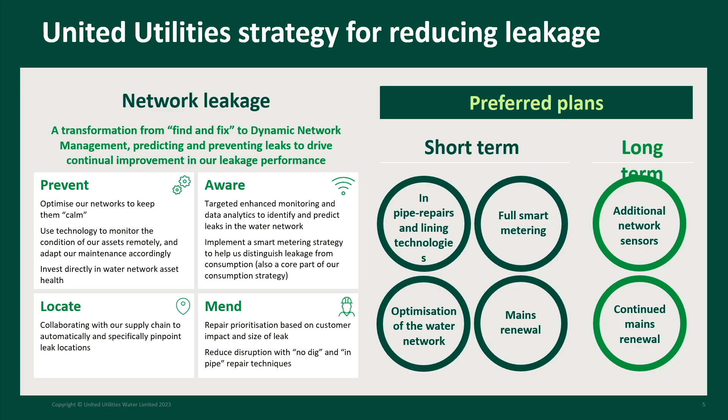And where it's coming from is a smart metering programme, so about 1 million household and non-household smart meters going in the ground over AMP8. And we know that comes with a massive data analysis burden or need, as well as a complete change in how we engage with customers around what's been spoken about already. So customer side leaks, plumbing losses in properties - that's one of the major parts of the strategy.

We're doing additional work on pressure optimization, so that's around optimizing our DMAs, but also optimizing the pressure management valves we've got in our network. But a lot of the leakage reduction we've planned is to come from replacement of water mains. So 695 kilometres of water mains, which fits into our wider programme of just under 1,000 kilometres of renewal.

So that's why we are posing some of these questions that Sam's going to talk through, because it's a really critical element of our programme in AMP8, and we don't really see a way to halve leakage by 2050 without a lot of this activity around mains renewal.

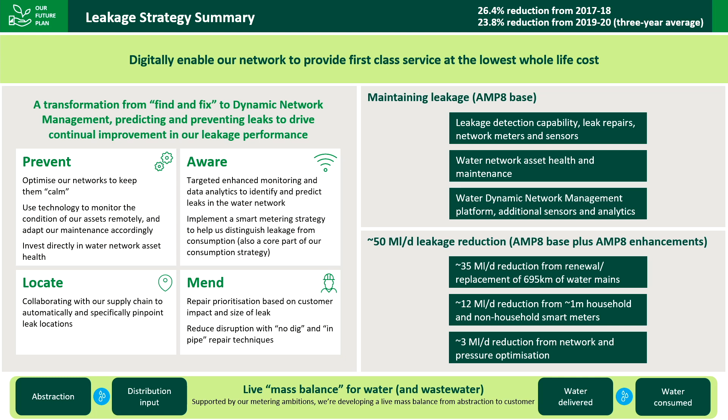So yeah, that's broadly our strategy. You can see the strapline: digitally enable our water network to provide first-class service at the lowest whole life cost. That's the aim. But this is a bit of context to the wider discussion on how we deliver mains renewal without the supply interruptions impact.

So when we were coming up with this strategy, we had to think about what was our priority. One of the key things we wanted to focus on was how do we get this balance between long-term investment and short-term performance-driven activities. So asset health was a key priority.

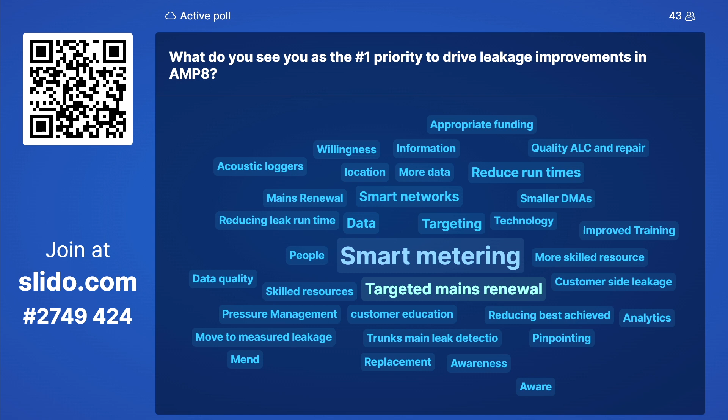Super, so by all means, please keep filling that in. Because what we'll do is, I want to take this as live customer research, or client research, or whatever you want to call it. This is going to feed into shaping some of those route map activities going forward, and actually really getting a view from experts across the room, from various different walks of life, what they see as key priorities for us going forward.

I'm thrilled somebody said targeted mains renewal, because it would have been really awkward if nobody had said mains renewal for the rest of the presentation.

But one thing that always strikes me when I ask these questions is around the temporal scale and the time scale of some of these activities. Some of these things are quick wins. Some of them are far more drawn out activities.

There are two different trains of thought, I think, of how we can tackle leakage. There's fast-paced, accelerating towards leakage targets that we set ourselves on a monthly, annual and in-AMP basis. But there are always hurdles in terms of how we need to deliver that performance. They may be technological hurdles, or something in terms of the environment in which we work in, whether it's an urban environment or a rural environment.

So I've kind of summarised that by saying, well, that's like the 100-metre sprint hurdles. We know where we want to get to, but actually it can be quite hard to get there based on some of those hurdles we've got.

And I was thinking, well, how do I represent that long-term view then? So long-term might be around those asset health improvements. Smart metering, it's going to take time to deliver increased meter penetration and build on those data sets and our understanding from that.

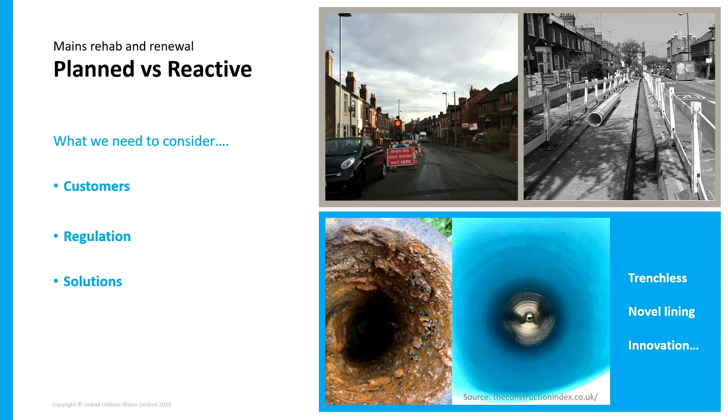So again, what we've got to try and work out is what's this balance then between customer interaction in terms of what they value and how quickly they want the water on.

Joe made a really important point that we've got to make sure that we're considering our priority services customers. There might be customers who any length of interruption is a no-go. So what plans can we put in place to mitigate that risk?

But also let's have a think about some of the other broader disruptions. Are there technologies, techniques, which mean we don't have to have 12 sets of traffic lights, which mean your school run takes 4 times as long and you've got screaming kids in the back of the car. So there's a broader customer dynamic to this, not just when's your water off, when's it back on again.

Now regulation at the moment does drive the way in which we deliver planned activity. If you look at the water supply interruptions associated with planned work across the sector, it's quite low, but it's quite low because we target that. We look at ways in which we can deliver planned activity, whether that be in infrastructure renewal or any other activity, adhering to that 3-hour window.

What that has meant is that infrastructure renewal rates over the last 10 years are probably at an all-time low compared to where they were historically. Certainly from a United Utilities perspective, we've not done a huge amount of renewal since about 2010, because we had really significant programs primarily focused on water quality up to 2010, and then have targeted other assets, so service reservoir inspections and remedial activities since then.

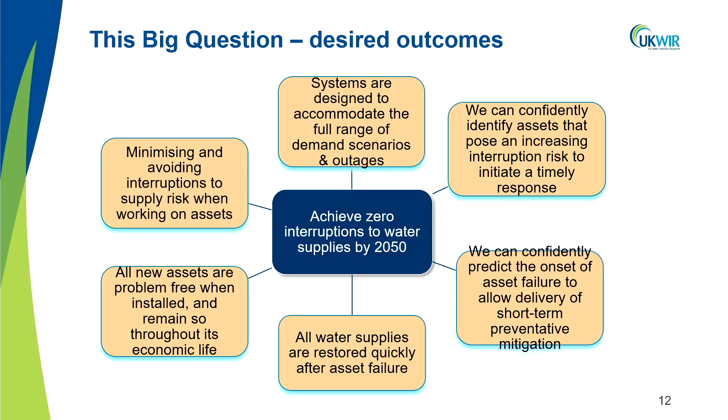And then the top outcome on there — this system is designed to accommodate a full range of demand scenarios and outages — really links onto this final slide, which is a question that is currently out for tender at the moment as a project. So some of the room may have seen this already.

As a big question team, we reflected a little while ago and said we've got great coverage at the moment, great understanding of two extremes. So water resources management planning — we've all got a framework that we work to. We've got a great supply chain that we call upon to support delivering those water resource management plans on a cyclical basis. And at a shorter timescale, we've got phenomenal understanding around our modelling capability, hydraulic models, water quality models, etc. But it felt like there was a bit of a gap in between.

At the moment there isn't consistency across the sector for that. Part of that is because we haven't necessarily got a framework to assess the benefits of those different opportunities, what works, what doesn't work. So really what this project is trying to do is look at, right, how do we balance things here?

I've used that word a few times while talking for the last 10, 15 minutes or so. How do we strike a balance where we've got customers' needs at heart, but we've also got a really clear view on those long-term challenges, the hurdles we're going to have to jump, that hopefully we're not going to fall over and get wet in.

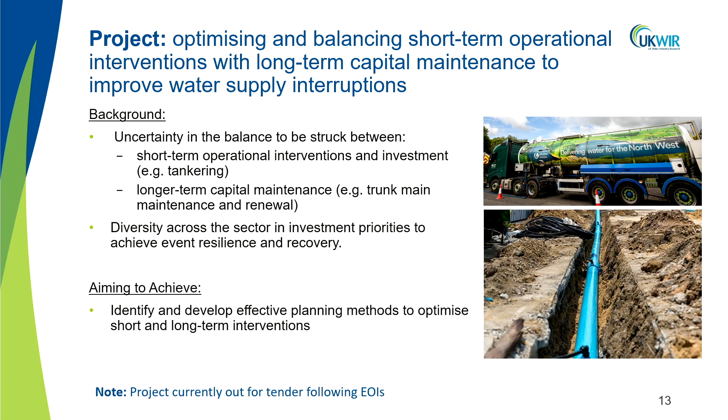Adaptive planning is here to stay. I say to a lot of people at the moment, I think in certain parts for PR24, adaptive planning feels like it's been forced on us. We've been told it's the right thing to do. It is the right thing to do, and that's one of the things we've really got to focus on going forward.

So I think that's really all I wanted to say. So my kind of plea for everybody in this room is, if some of the stuff that I've talked about today is important to you — and that might be you individually, it might be for your company, for your business — let me know.

Let Joe and Joe Parker know, because this is all part of the one voice journey we need to be going forward. Jez has spent some time over the last few weeks and months touring the country, not just for fun, but to speak to people about leakage and what it means for the leakage route map. The feedback from those sessions is that this is important and we need to talk about it. We need to come together as one voice through the leakage route map activity and the MEND work package, so we can establish what that looks like. This isn't a United Utilities view or a UKWIR view, it's a water sector view. I'll leave it there. Thank you very much.

So I presume we've got some time for questions. Do you want to just open that up for me? And then, yeah, hi there, thanks for that.

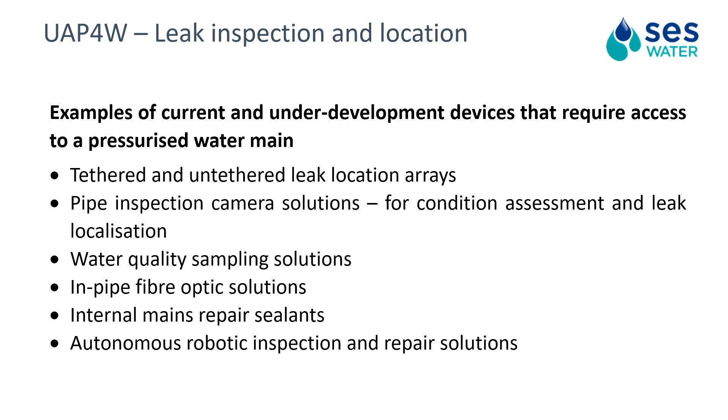What I was looking at was leak inspection and location. There's loads of devices out there, either current or under development, that we need to get access into that pressurised water pipe - tethered, untethered leak location arrays, pipe inspection, water quality, in-pipe fibre optics, internal mains repair sealants, and autonomous robots. The issue we've got is, every fitting we have is designed either for keeping water in the pipe or letting water out of a pipe. There is nothing designed for putting devices into pipes.

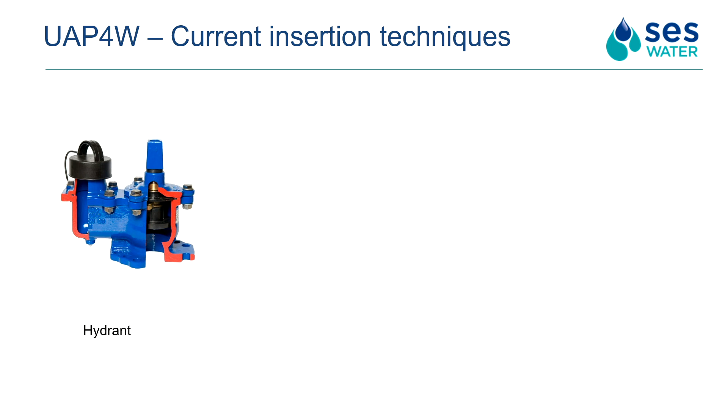So we said, okay, can we do something about that? Currently we say you do it through a hydrant, and everybody goes, that's all right, we've got loads of hydrants, just stick it through a hydrant. The issue with going in through hydrants is manifold. You speak to the suppliers who have to do this, and they'll tell you the number of times they turn up and are told it's a through-bore hydrant, it's easy, you can get on it, no issues - and then they turn up and can't get the camera in. It's not a through-bore hydrant, there's all sorts of issues.

The other issue is all your devices are constrained to go through a tiny entrance point. So every camera, every array, every sensor we put down through a hydrant has been naturally constrained because it's got to fit through that, and navigate the bends and turns inside a hydrant. Of course we could do under pressure tees - simple solution, cut in an under pressure tee and do it through there. But talk with the guys that have to do this, and they start waving their hands and looking very pale, because as soon as you do an under pressure tee, you've got a sharp edge on the inside of your pipe, which snags up all your cables and causes no end of problems.

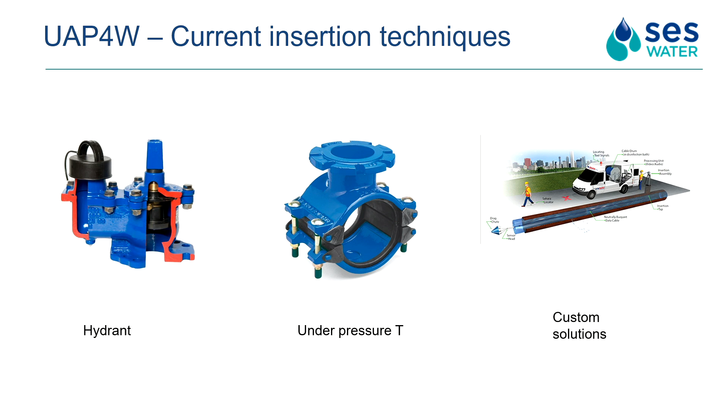Well, that's okay, we'll all come up with our own bespoke solutions - Sahara, come up with your own solution - but the trouble is that's designed for their solution, not for everybody. So we looked at this and said, okay, we need something we can install either when the main is laid, or subsequently cut into a pipe. It's available for a range of materials and diameters. It's a standard entry, but it fits 3-inch up to 12-inch. It's a single standard entry port, and it will allow devices either tethered or free swimming.

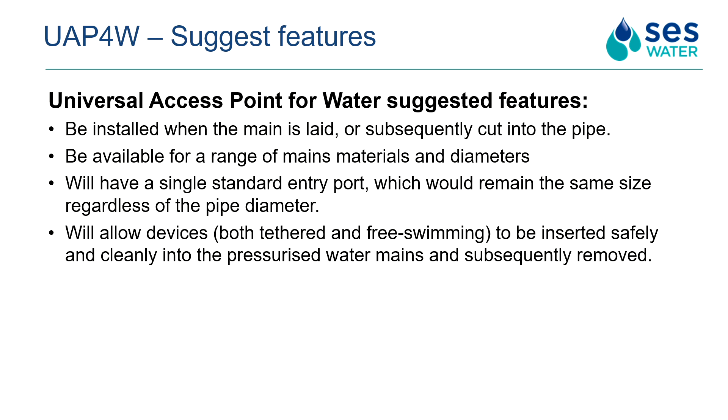You can stick them in and it'll go into a pressurised water pipe fine. DWI are looking at this - they're obviously slightly concerned with what I'm doing, going, you're putting stuff in pipes. I'm going, we're putting stuff in pipes anyway. Let's actually use something that's designed to do it rather than something we've just adapted, and we'd have safety features that stop someone unauthorised from doing that, as opposed to a hydrant, which anybody can go along to.

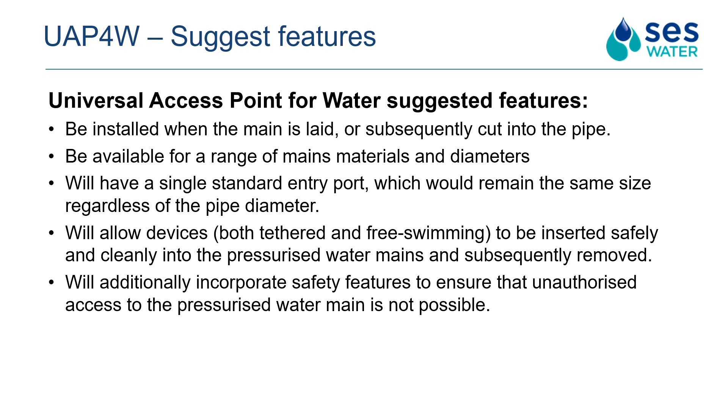And then have connection points as well. So the interesting thing about this is I'm running this project in a very similar way to how I'd run an innovation project at SES Water, my own company - rather than apply for all the money at the beginning and go to my directors saying I need this much cash to develop this and build prototypes, because the first question they'll ask is, is there actually a need? What's the design look like? So in fact, that's what I'm doing first, and that's all I've applied for in terms of funding. We're literally just doing the design piece and coming up with what it looks like.

The second really interesting thing I'm doing is looking at the IP, because generally the intellectual property associated with this is owned by someone, and they license it out saying, yeah, you can use my design, but you pay me money every time. We said, nope, not doing that. When Volvo invented the seat belt, they said this is for the good of the world, and put no IP on it because it's for the benefit of everybody. Interestingly, karaoke machines have no IP either - not that it's relevant here, but this is open innovation. There's no IP associated with this, so once we've done the design work, any suppliers out there will be able to pick it up and run with it.

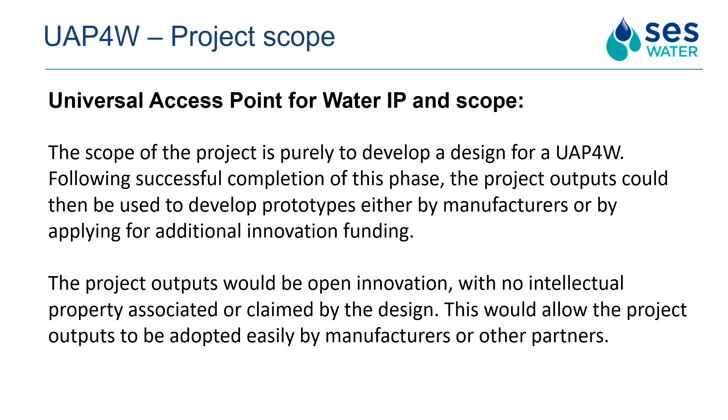And when we're doing this, we're not just doing the design work - we're going beyond that and looking at all of the economic values. We're looking at how much we think it will cost to produce. We're doing all of that side as well, so it's a complete piece of work for anybody out there to pick up and run with.

What's the advantages? Standardized dimensions - meaning devices that currently can't get through a hydrant, you could use. We get better sensors, better data storage, better battery capability. You can gather opportunistic data.

One example I've been talking about: you have a burst main. What you want to know is, is the whole main rotten? You'd love to know what it's like 150 meters in either direction, but supply interruptions are 3 hours - you've got to get it on as fast as possible, and your guys are standing there ready with torque wrenches to bolt it up as fast as they can. There's no hope of getting a camera or sensor device up there. So drop in a UAP, get it bolted up with the rest of the kit, turn the main back on, and suddenly you've got a point where we can put the camera both ways up 150 meters and actually look at the pipe to work out what condition it's in.

You've got a new estate being built - it's going to be laid in plastic, which we all love because, hey, plastic never leaks - as we all know, it does, and we have issues on those plastic mains. So you say to your developers, you're going to cut in UAPs here, here, here, and here, because in 4 or 5 years' time, when we're looking for leaks on your network, I want a point where I can stick a device down easily and run it through the network to find out where the leakage is coming from.

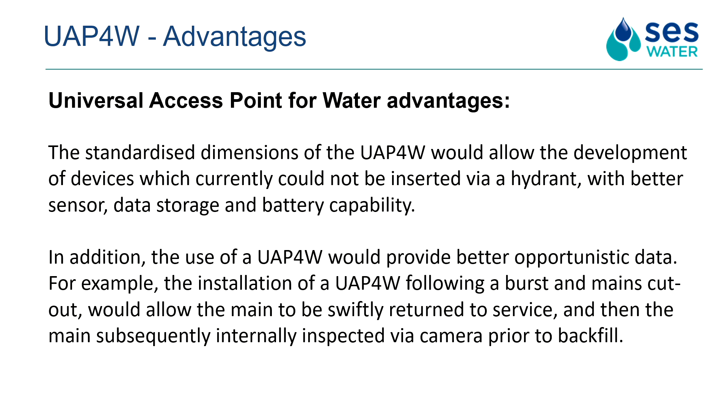So I'm working with them on that, and then Fluid Consulting as well, who are managing the project with me. So where have we got to?

Everybody gathered together and started going through. We ran it as a virtual session as well, so we did one that everybody could come to in London, and then we did the virtual session. Everybody could feed into that one as well, and we said, okay, why do we need a UAP?

What are the current limitations? What will it enable? Loads of post-its, you know what these things are like. Loads of coffee, post-its and cake.

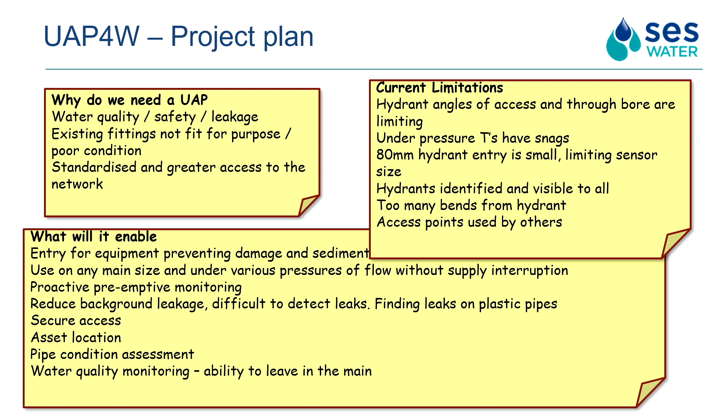And we started to come up with, okay, what's the must, should, could, and won't. I haven't put all of them up on there, but this is what we started to come up with. So we've now got an understanding of what this design should look like.

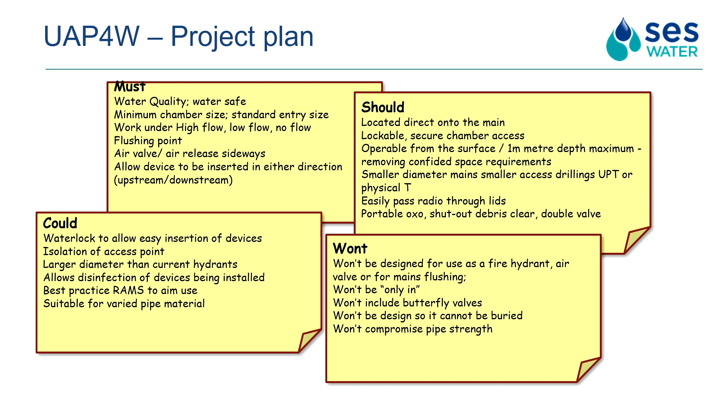So we're at that point at the moment. It's early days still, yeah? We've now got to take that must, should, could, and won't and start to turn that into physical designs.

I think I've won you some time back, haven't I? Yeah, fantastic. I'll do questions in a second, but look, the reason I'm telling you all this is...

Firstly, this is an Ofwat funded project. You've all paid for it, every single one of you, because if you pay your water bill, that's where that Ofwat fund comes from. Okay? So you deserve to know what's going on. So there we go, that's what some of your money has gone towards funding, this understanding. Okay? And secondly, you may want to be involved in it.

So as I've gone through this, you're thinking, yeah, my company would want to really be involved in that project. Fantastic. Come and see me, catch me, I'm at the conference, and grab me and say, yeah, we'd love to be involved in this. When's the next workshops? Can we see the outputs? Because although I have 8 companies working on this piece of work, it's open to everybody to join. Those workshops are not just for those 8 companies, they're for everybody that wants to be involved in this project and sees advantages, maybe just for their company. They're going, yeah, we'll be wanting to pick that up, or we want to redesign our sensors so they can use this. So please be in contact, love to have you involved and engaged on that.

I'm going to stop there, and you're thinking, fantastic, Jez doing a short talk for once. I'm going to stop there, but I will take any questions first. I need to jump back here, don't I, to the tablet? I don't, you stay there, mate, don't worry. I'll stand here. We've got the... So any questions in the room to start with?

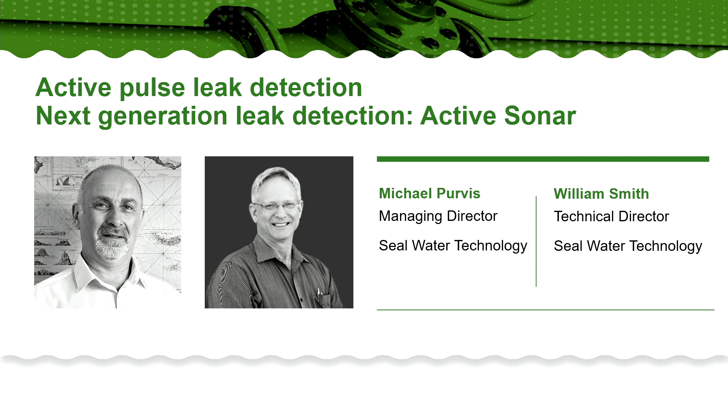As mentioned, my name's Michael and I'm the Managing Director of Seal Water Tech. We've been fortunate to be selected as finalists for the Ofwat Water Discovery Challenge, a funding program for smaller tech companies on a lower TRL.

Along with William, who you've just seen, coming from Australia - it's very early in the morning there, or very late at night, I'm not sure, but it's probably late at night because he's a night owl.

What we want to introduce to you is a new approach to leak detection: active sonar. With this technology we can detect leaks kilometres away in all pipe materials, including plastic. It's non-disruptive and non-intrusive to pipe networks.

So just showing you quickly here, this is one of our units, connected directly onto a fire hydrant going through a faucet valve. This was taken at Brands Hatch in Kent.

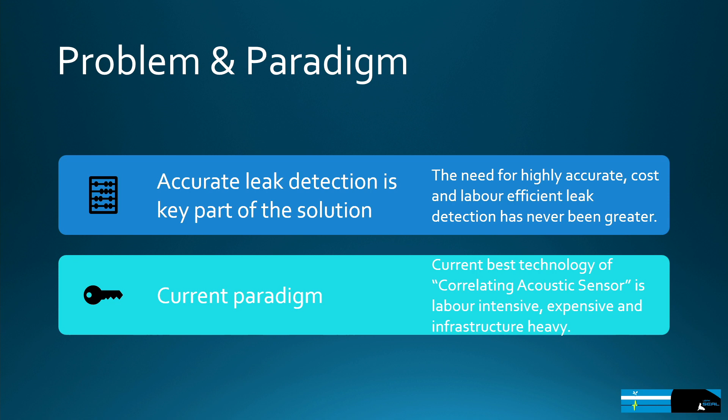I won't dwell on this too much, particularly with this forum, but water loss through leakage is a massive problem worldwide. Here in England and Wales, overseen by Ofwat, water loss through leakage has been driven down significantly. However, we're now approaching a scenario where all the low-hanging fruit, the easy to find leaks, have now been found and repaired. This plateauing is partly due to the limitations of current best technologies out there.

What we can consider one of the best technologies is correlating acoustic sensors. However, due to the fundamental physics of sound in water, these are limited and always will be limited to 200 to 300 metres in range.

So to break this low-hanging fruit scenario, we need a step change improvement in technology. This is where Seal's long-range solution can play a significant role in finding those hard-to-get leaks, particularly useful in trunk mains where you have limited access points.

If you've got, say, a 5-kilometre pipe and you've only got access points every kilometre or 500 metres, to correlate that you would need to get down to the pipe and put access points along there. We can do this from either end or from the centre.

It works equally well in plastic pipes - correlators are further reduced in plastic - and it's ideal for critical infrastructure where you don't want to be touching the pipe.

I heard people talking about the risk of access in the pipe. Some infrastructure you don't want to be touching, you just want to be monitoring it. As long as there are some access points on there, we can get in there.

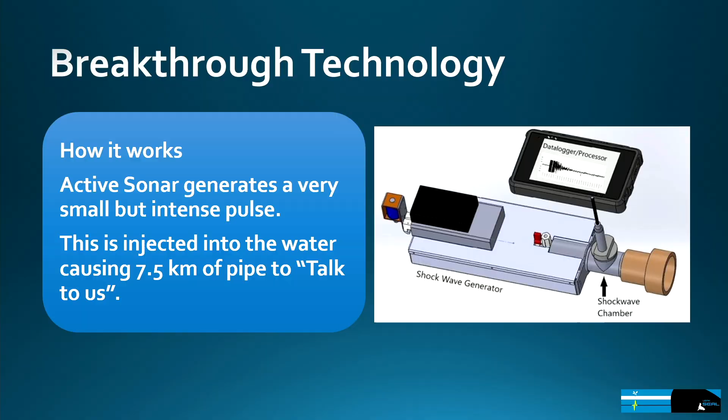How do we do this? What we do is generate a very small but intense pulse. We then inject this into the pipe, and this pulse travels down the pipe within the water.

This pulse travels down the pipe in the water and then interacts with points of interest.

These interactions we can detect, leaks being one of them. From this we can calculate the distances out to these points of interest. We can also pick up T's and elbows.

This is one of our data sets. On here there is 7.5 kilometres of pipe data taken from one test at one location. I'll start from the left.

On the left here, this is your background noise. On the left, this is where we've injected the signal into the pipe. Initially we get a lot of background noise, but this quickly dies down.

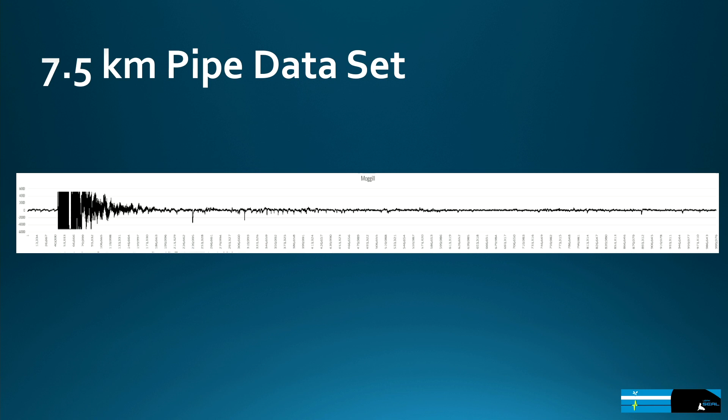As you move along, you can see negative pressure events all along here, and these are far greater than the background noise. What I'll show you on the next slide is what these line up to.

So going from left to right, that is distance from the test point, and this is 7.5 kilometres. Even at this range here, we're still picking up pipe features.

Drilling into the data, far left again, that's where we've initiated the test, and it quickly settles down. We have a big negative pressure point here, which lines up with a road intersection and a pipe intersection.

As we further go across to the right, we have a series of negative pressure events. These, I will show you later, lined up with 25mm T-sections coming off this pipe.

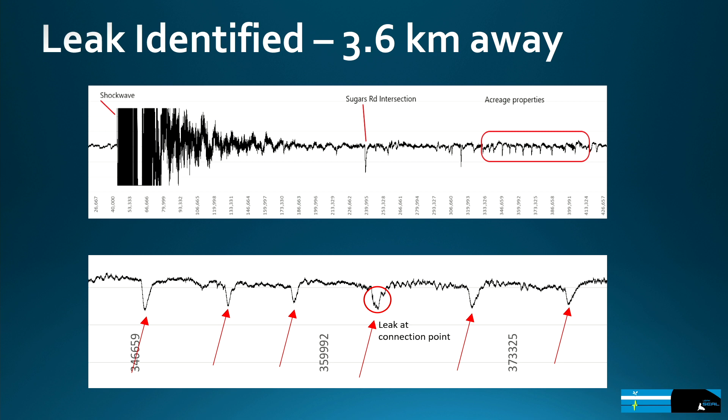Drilling in again, these are the same negative pressure events, and this one here has a classic leak signature. That's what we're looking for. This is our business - we then went out to this site, located the leak, and repaired it.

What we then do is scale our reading onto a GIS map. Up the top left here, where the circle is, that's where we did the test. The signal went to the left and to the right, then the signal came down the page, and this is the road intersection here, and some of the signal went left and right from there.

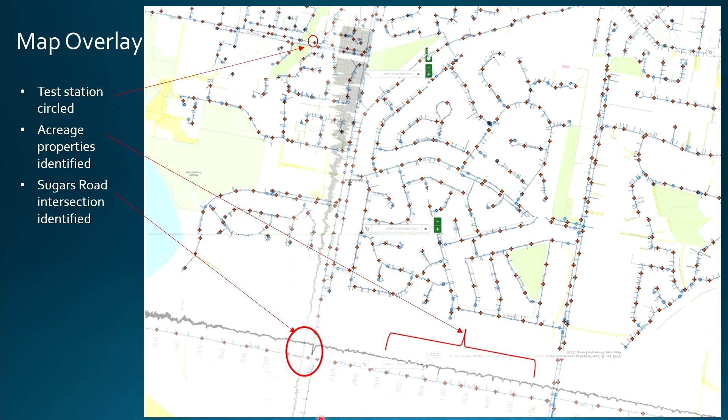Here is a series of small hobby farms, and this is where we got those series of pipe fittings. Like I said, we went out to the site, and the leak signature was tied into one of those fittings.

So where's the value in all this? Firstly, it's long range—we can survey kilometre sections of pipe at a time. Sound methods only cover a few hundred metres at a time, assuming you can get access to it. To monitor or survey a DMA, only a few units or tests are required. It's non-destructive and non-intrusive—as you saw in the first slide, we connect directly onto a fire hydrant, so it's ideal for monitoring critical infrastructure.

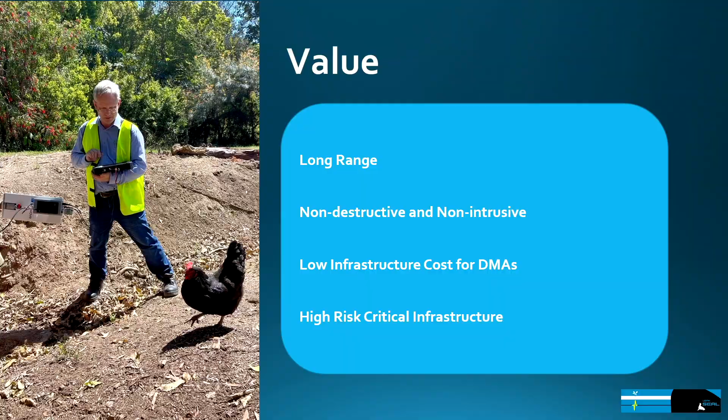So what have we been doing since we got the first part of the grant money? We told Ofwat we'd be spending the money on software, hardware, and doing proof of concept trials in the UK.

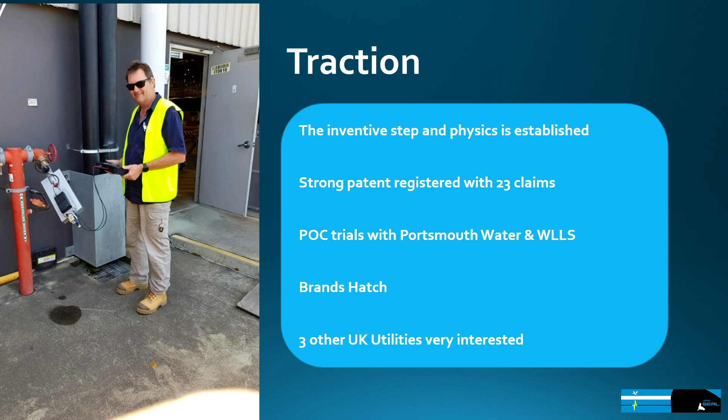Since the grant, we've been working with Andrew Mackenzie from Water Leak Location Services and Matt Burrows from Portsmouth Water. We went down there and had a series of pipes where we were testing. We've done a test on a larger diameter pipe—our prototype units are only designed for 50 to 80 millimetre pipe, but we tested on a larger diameter one anyway.

This pipe was previously correlated, with access points every 500 metres, and there was a leak signature picked up with correlation. We could verify where the leak was, but to be honest, because of our signal strength and the size of our unit, it's not designed for that size pipe. We could only pick it up because we were looking in that area.

So from that, we're now building a larger unit in Australia, up to 500 millimetres. That will be tested and run through in Australia before we bring it out to the UK.

We've also done another trial down in Portsmouth where we had a 3.2 kilometre section of pipe. We went to the first point on the test, but it was too noisy, so we went to the other end of the pipe, and we picked up a leak signature.

This was later verified by satellite to say there's a leak in this area, but again, that hasn't been dug up yet. We've retested it again, and we're just going through the data to try to locate where the leak is. We're testing it from both ends—previously we only tested from one.

We did a signal strength test. We got Andrew and Carl from Portsmouth Water and put them in a field 1.2 kilometres away from the test point. We sent a signal down there, and they picked it up 1.2 kilometres away from the test point. That could never happen with sound technology.

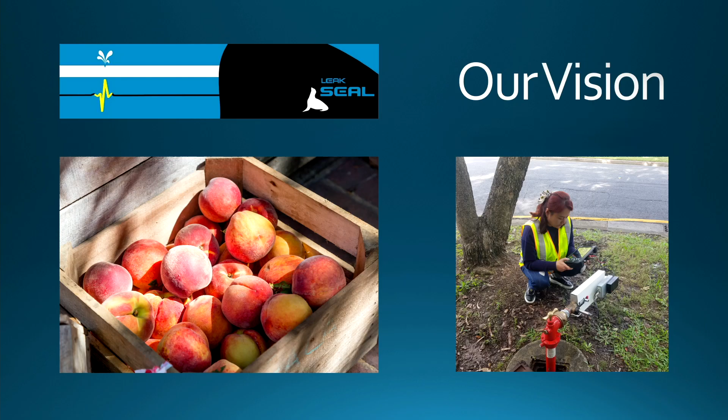So just finishing off, if we want to make water more efficient in England and Wales, we still need to deal with leaks. We've got rid of the easy ones. We now need technology to find the harder to get ones. This technology will help build more sustainable networks for the future.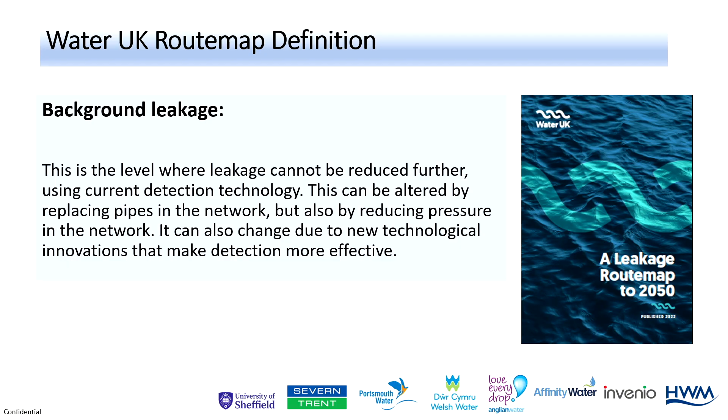So this project came about at the start of 2021, shortly after Water UK had committed to this 50% reduction in leakage by 2050. And I put this graph together.

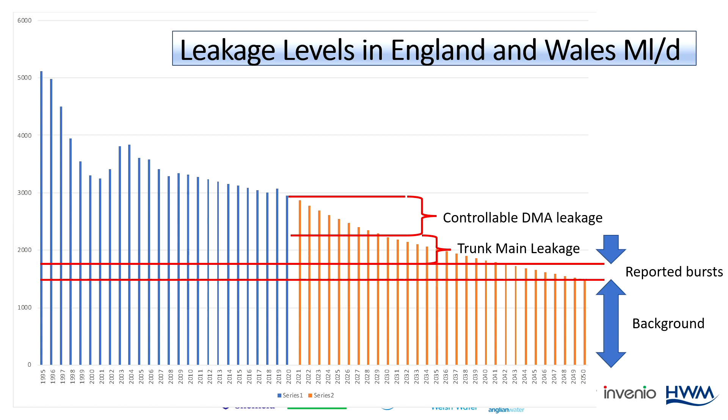It was a bit of guesswork at the time, but what I was trying to show was how can you reduce leakage by 50% if, as a guesstimate, 50% of that leakage is what we call background leakage? On top of that, we've got leakage from reported bursts - everybody has a burst that's running that they know about, awaiting repair. And then you have trunk main leakage on top of that.

So the background leakage, we really refer to background leakage in DMAs. There's only this bit at the top, probably 25% of the leakage, which you're controlling by new technology to become aware of leaks quicker, find them quicker and repair them quicker. So really the challenge is, what do we do about this background leakage and how well do we understand it?

Some terminology: MAL is the minimum achieved level of leakage, and that's what we focused on in this project. It's the historic minimum achieved level of leakage in the DMA from night flow measurements.

We actually had a challenge of how do you define that though, and we had to come up with a method of estimating it. Then MABLE, the minimum achievable level of leakage, is based on the theoretical minimum achievable level, based on infrastructure in good condition from the managing leakage reports. Essentially, the MAL level is the level of leakage you're left with after you've done a normal leak detection sweep through a DMA.

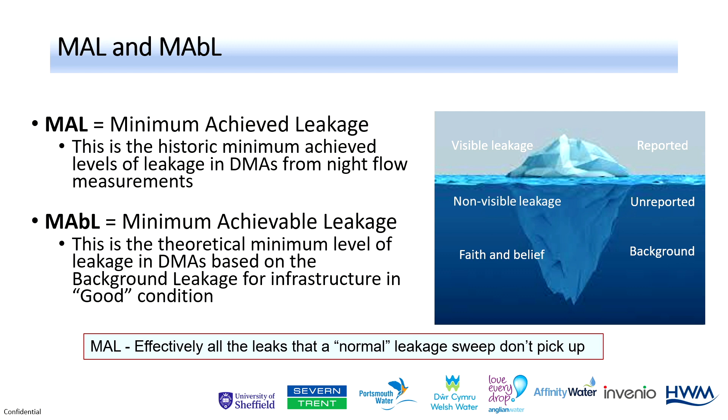MABLE is based on this table in Managing Leakage 2011, report 4. It was originally introduced in the managing leakage reports in 1994, and defined as the level of leakage from minor leaks - small leaks from valves, joints, hydrants and so on.

It was believed that those leaks would generally be less than 100 litres an hour and not individually identifiable on a DMA flowchart. But the report did say there could be some undetected leaks in the range of 100 to 500 litres an hour in those DMAs.

And we sort of picked up on that and thought, well, how many of those larger leaks are included in the minimum achieved level of leakage, the MAL level? But again, it was expected that leakage level, that MAL level, would reduce over time.

But it's 30 years since these reports were produced. Technology's moved on a pace, and yet we're still left with 50% of our leakage being this MAL. We estimated that at the time. So that's the background to the project.

Just to point out that these values were actually heavily weighted towards the customer side at the time. The distribution mains is in litres per kilometre per hour, and the service pipes, the com pipe and the supply pipe, are in litres per property per hour. But if you look at a fairly average mains length per property, it is heavily weighted towards the supply pipe rather than the mains.

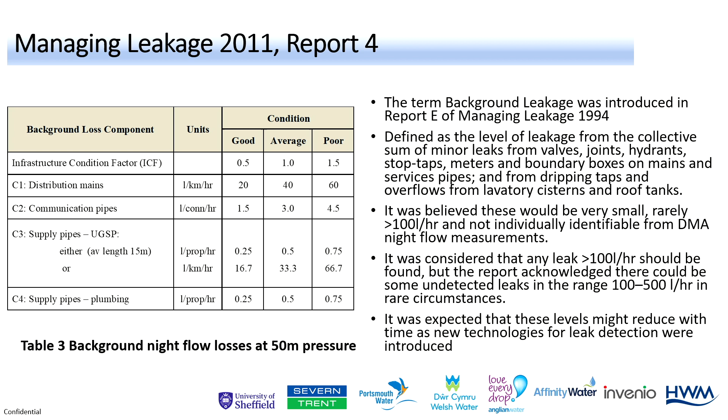So the project that we have funded by, or largely funded by Ofwat, aims to reduce that - it aims to redefine the detectable limit of leakage. Can we reduce the background leakage or the MAL level by finding some long-running hidden leaks that have evaded leak detection?

The project's led by Welsh Water with support from 4 other water companies: Anglian, Severn Trent, Portsmouth and Affinity. The total value of the project is £3.5 million over 30 months, so it's quite a large project. HWM and Invenio and University of Sheffield are the main contractors.

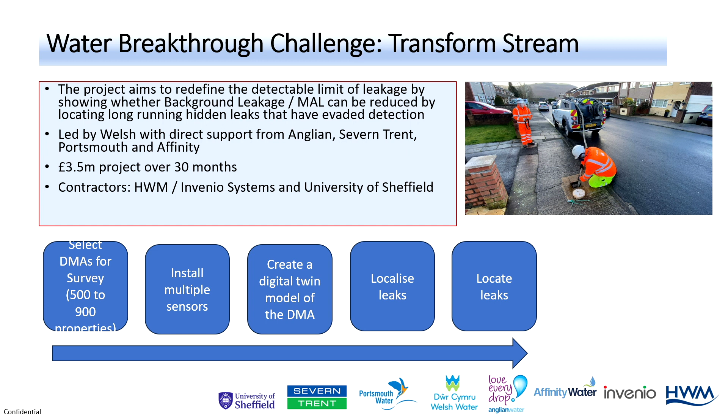These are the stages that we go through. We select DMAs for survey, usually between 500 and 900 properties, averaging about 700. We've got one coming into which is larger than that.

We then install multiple sensors and create a digital twin, or network model, of the DMA. We localize the leaks using that model, and then we have to use the technology we've been hearing about to pinpoint where those leaks are occurring.

So things we're doing differently: the model we're producing doesn't group demand to nodes in the network. We're creating an all-connections model of the DMA.

We're profiling the consumption at 1-minute resolution, largely using our stopwatch temperature loggers, which we've been doing for 8 years now, but also smart meter data where it's available. We're modelling the consumption profile for the remainder based on those logs.

We're logging as many properties as we can, and using that data to model the rest of the housing estate. We're fitting pressure loggers to every available hydrant for 15-minute values, but we're also collecting transient data.

100 hertz pressure logging, 24 hours a day, 7 days a week, on 3 to 4 points in each DMA. That's an awful lot of data we're collecting, and the loggers have been designed specifically for this project. We're also installing acoustic loggers across the whole DMA, and then combining the data sets.

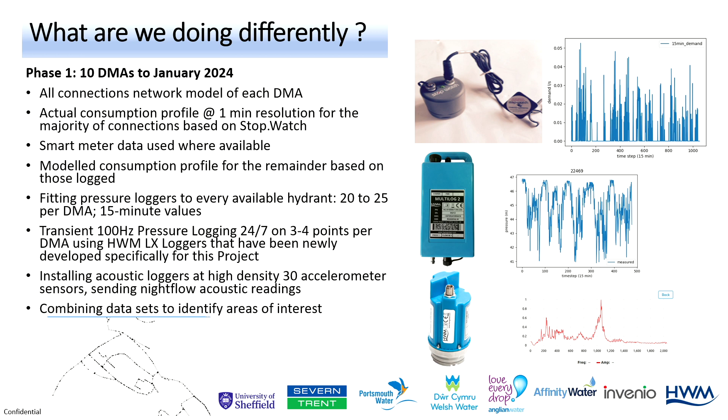The little diagram in the bottom left is this all-connections model that the University of Sheffield have produced to collate the data.

So where are we up to? Taking them company by company, the first 2 DMAs in Welsh Water are complete, and the analysis is complete. We then went into Severn Trent.

The fieldwork is complete in both urban DMAs. We've got an area of interest in the first DMA that we're following up on, and we're currently processing the data on the second. We've then been into Portsmouth and done their 2 DMAs, which has just recently been completed, and we're analysing the data.

Anglian, we're starting today in the first DMA, in an area that's largely smart metered - I think it has 85% coverage of smart metering. And we're just finalising which 2 DMAs to go into in Affinity in the first part of the year.

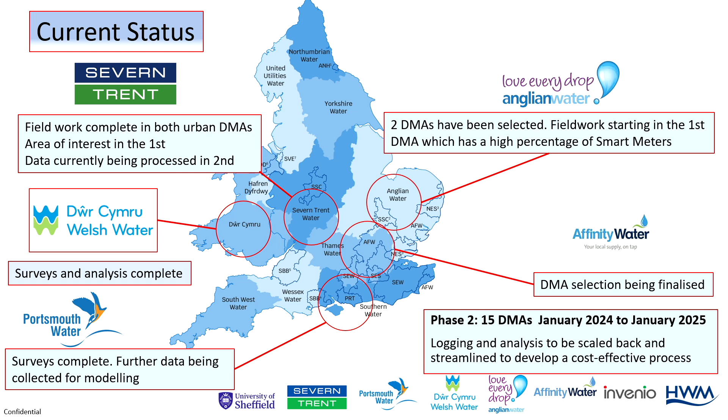That will complete the first phase of the fieldwork, and then starting early part of next year we have to do another 15 DMAs - 3 DMAs for each of those 5 companies - where we scale back the extent of logging to make it more economic or practical. We haven't yet decided exactly how to do that, and we've got a meeting coming up to work out the process.

We've got country lanes where the stop taps are in the roads with national speed limits, and again high speed roads in urban areas we've been into. Some of these stop taps we just can't find at all. Some of them are on joint supplies. Some of them are full of material, debris that we have to clean out.

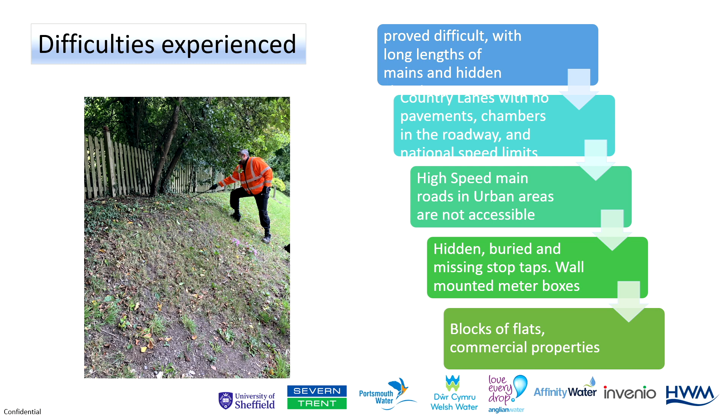And then in Portsmouth we have a new problem where we've got modern houses with wall-mounted meter boxes, and our stopwatch system isn't designed for that, so we've had to come up with an alternative. And then we've got things like blocks of flats and commercial properties where we've had to find a different way of estimating consumption, or leaving that and moving on to the next DMA.

As I say, we've got an awful lot of data. One of our biggest challenges over the last year has been to produce a data warehouse and look at the data flows in that data warehouse. I'm not going to go into detail, but we've got the field team, the analysis team, and University of Sheffield and the water company, with data going between those various parties.

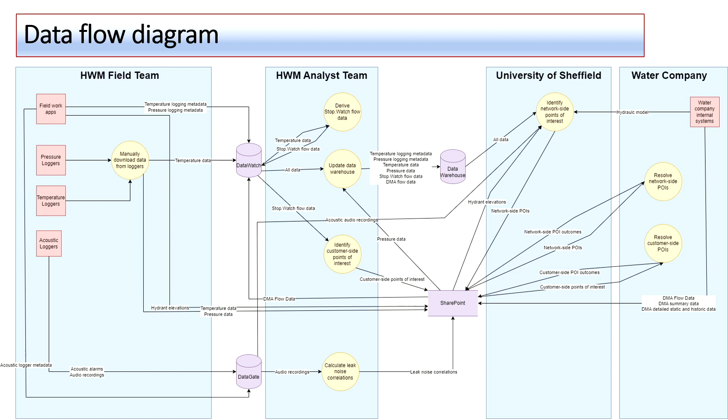And it has some interesting data in it. We had to publish all of the data, but we've been allowed to redact some of the individual company data. What this first table in that report shows is that the total megalitre a day of leakage in those 5 companies is 935 megalitres a day. So that's about 30% of the England and Wales total. So it's a good size sample to go on.

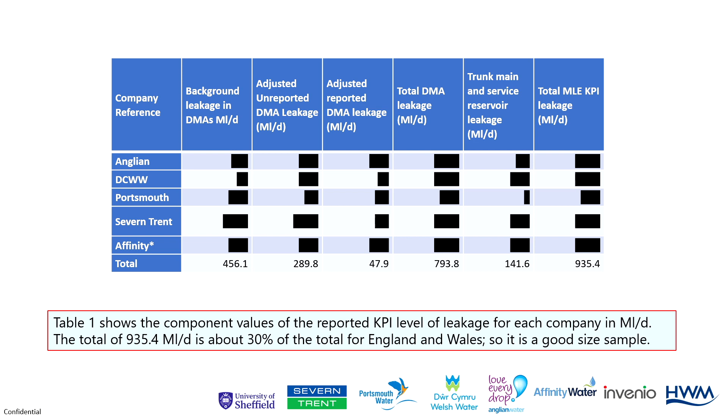The second thing it shows is that 49% of the KPI leakage in those 5 companies is MAL, it's background leakage. So our guess of 50% was pretty accurate. Then we have reported leakage of 5%, unreported leakage of 31%, trunk main leakage of 15%. So that's the average over those 5 companies.

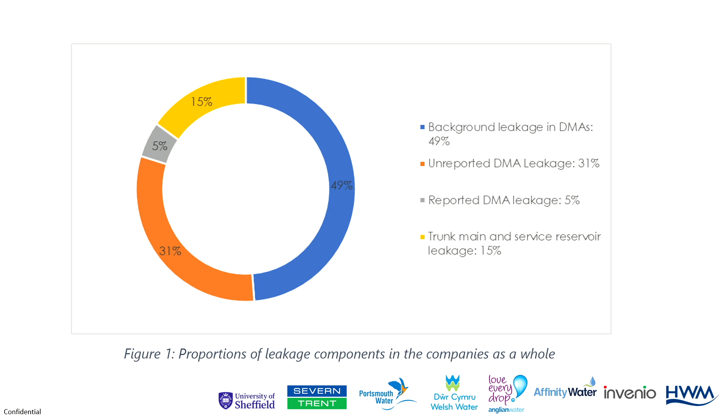So I think it's important when you think of leakage, not to think of leakage as one entity. Where is that leakage occurring? And then also, what type of leakage is it? Which I showed earlier, the iceberg diagram of reported, unreported, and background leakage.

And then when we've looked at the distribution of that MAL level, that background leakage across the DMA stock in those companies, we see that there's a wide variation. What we took as the MAL was the 5 percentile value over, I think it was 3 years, Steve will correct me if I'm wrong. And the way we've displayed it here is we've got litres per property per hour and litres per kilometre per hour. But we've also put what we call the CRLI axis on.

If you haven't heard of CRLI, go onto YouTube and look up combined real loss indicator. It's an IWA initiative, essentially. It's a way of reconciling the level of leakage in a rural area versus an urban area and coming up with one measure of leakage.

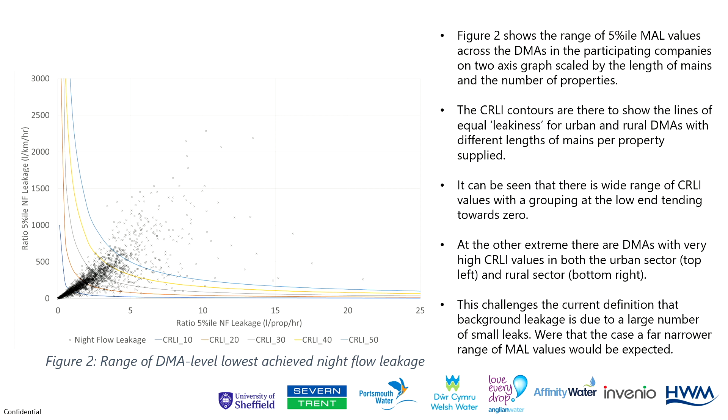But you can see that we've got some areas, some DMAs where the MAL level is tending down towards 0, and we've got others with very high levels of MAL. So if background leakage is defined as a lot of small leaks, you would expect that to be more evenly distributed across the DMAs, whereas in fact we've got some DMAs with next to no background leakage and others with very high background leakage. So that was where we got our suspicion that maybe some of that background leakage is due to a small number of large leaks rather than a large number of small leaks.

So the results so far, and this is just on the first 6 DMAs that we've looked at. And this is hot off the press from Friday, just before I sent the slides through. I'll try and explain it. We've got the total number of properties in those 6 DMAs, 3,237.

Our estimate of the MAL was 38,000, or 38 cubic metres an hour, let's say. The night use, our estimate of the night use, excluding the plumbing losses, varied quite considerably from 2.53 up to 4.87, so almost 2 to 1 in terms of the night use, the intermittent use events. Then we have the estimate of customer supply pipe, customer side leakage, that's both internal and external, and again a wide variation from almost nothing in one DMA, 0.75, up to 10 litres per property per hour in another DMA.

So we've then taken that, we've then estimated what the level of network leakage is. You can see in the first DMA, our estimate is that there is no leakage on the water company's assets. So that's mains and comm pipes, there's no leakage. Everything that you think is leakage is either customer use or it's customer side leakage. There's nothing on your mains, which again challenges this point that it's all a lot of little leaks on the mains. It's probably not.

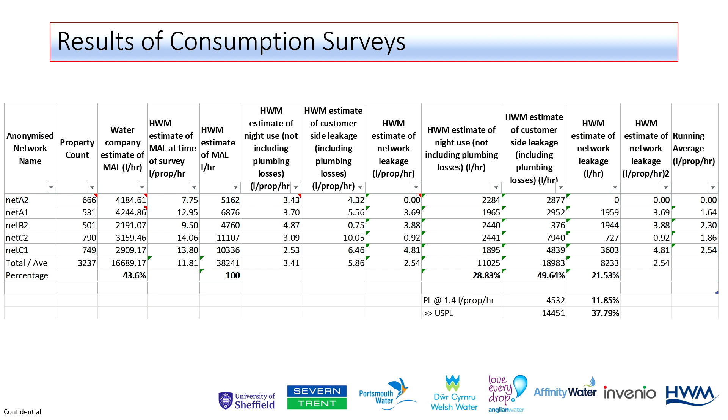What we have found is a lot of leaks on the customer side. In the 6 DMAs so far, we found 223 customer side leaks that hadn't been picked up by the water company's traditional leak detection survey. 135 were small, classed as less than 10 litres an hour, and 40 were large, over 60 litres an hour. That's still not huge, but it accounts for 14 cubic metres an hour across those 6 DMAs.

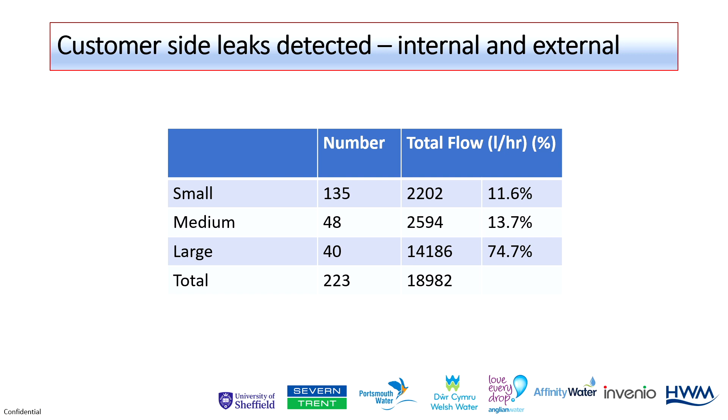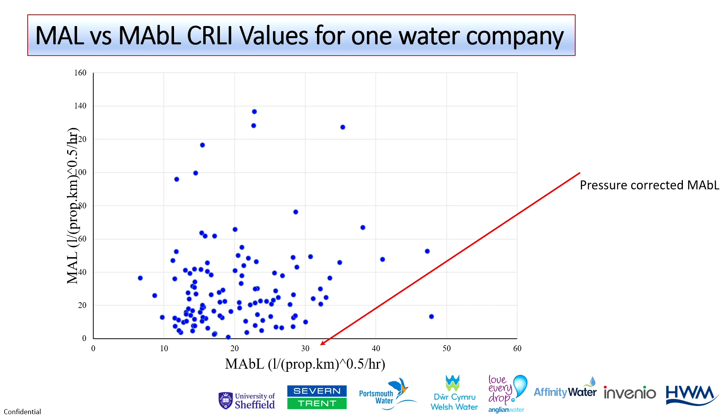What we've also done, just for one of the companies, is take the MAL levels and look at the theoretical MABL figures from managing leakage, pressure adjusted them, and looked to see if there's a relationship between the pressure adjusted MABL value and the actual MAL value. I can't see a relationship there. Don't know if anyone else can. It just seems quite random.

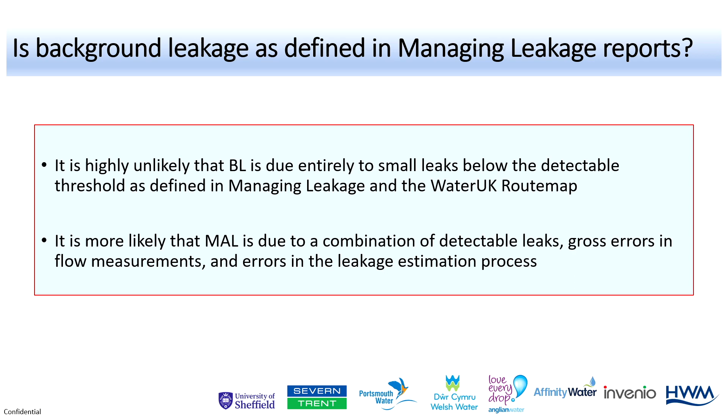So we posed this question: is background leakage as defined in the managing leakage reports accurate? I'm sticking my neck out here, but I'm saying it's highly unlikely that background leakage is due entirely to small leaks below the detectable threshold as defined in both managing leakage and the Water UK route map. It's more likely due to a combination of detectable leaks, errors in flow measurements, and errors in the estimation process.

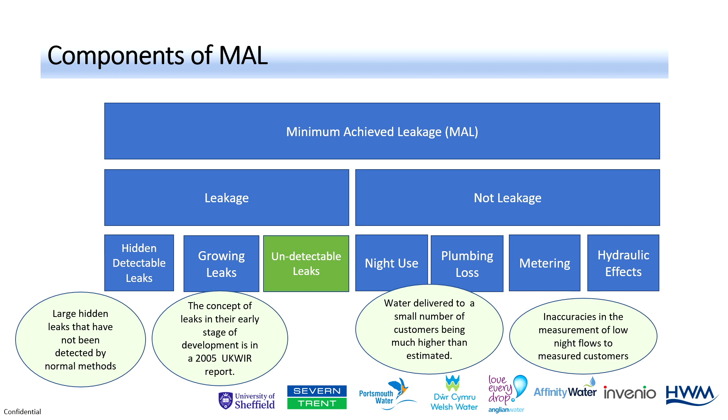Judith was quite keen for me to go last so I could pose some awkward questions for you and stimulate some debate over drinks.

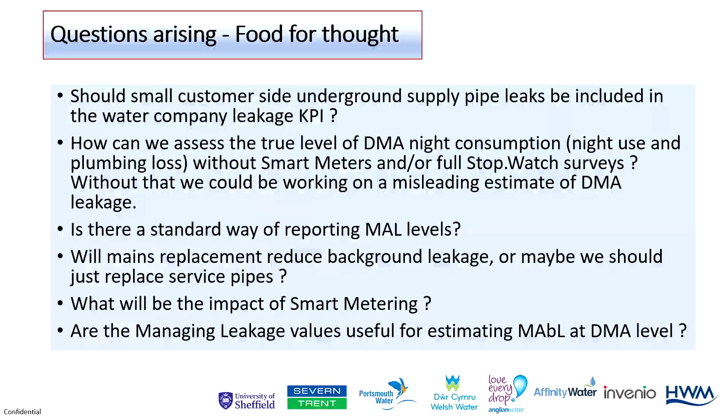And are the managing leakage values useful for estimating MABL at a DMA level? I've just shown that graph, I would start to question where they are. At a larger zonal level, where everything averages out, possibly, but not at a DMA level. That's me.

You okay to take a few questions? Yeah, okay, well let's throw it open to the room.

First of all, that's quite a challenging set of questions at the end there, isn't it? We're all wasting our time on mains renewals. I didn't say that, Bob. Well, that was the implication. Anyway, there must be some questions from this in the room. Or are you all too tired and you want to just go for a glass of something cold? Or dare you not ask?

Ian, have you got a question here? No, I was just saying I'll write down what you said about mains renewals. I'm talking about mains renewals and background leakage, not about burst frequency or asset health or anything else. I'm talking about the relationship between mains renewal and reducing MAL levels.

So there's a question down the front here. The mic's on its way. I was just going to ask, because you said you couldn't find some of the stop valves on those blocks of flats and all that. Did you just move to a whole area, or did you include all that in your data?

We went to a different area. The reason we've gone for areas of 700 properties with little or no commercial use is so that we can take that out of the equation. Where we have blocks of flats, you can get overlapping use events that look like continuous flow. It makes our stopwatch technology more difficult. So we can cope with small blocks of, say, four properties from a same supply, but once you get above that, again, you get the use events starting to overlap and look like a continuous flow. I just wasn't sure if you included that in your data, or we just moved on from it. That was all. We're just trying to take out as many uncertainties as we can and just say, look, here's an area where we're convinced of the boundaries, we know the housing stock, we're not thinking about commercial use and everything else. But we've got this level of background leakage. What is it? Where's it going?